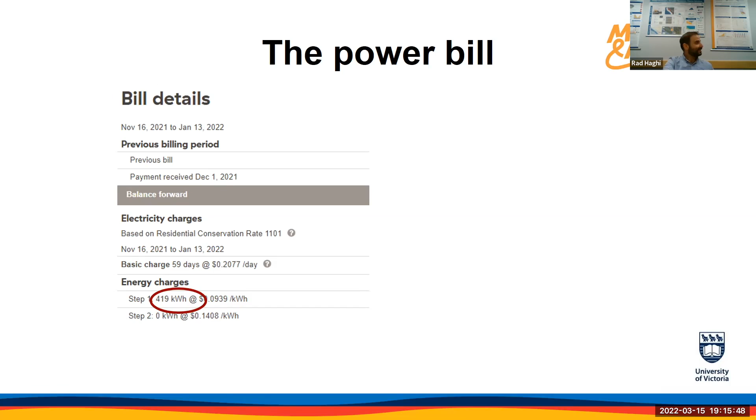But what is the meaning of power? When we talk about power and energy, what do we mean by that? If you look at one basic baseboard heater, which is quite popular in Canada, it needs 1 kilowatt of power. If it is on for 1 hour, then it is 1 kilowatt hour of energy. So we have to be aware of the difference between power and energy when we play this game.

In this game, we mainly talk about power rather than energy. That's why this name is called megawatts, because in reality we deal with megawatts. When we talk about the grid system, megawatts and gigawatts, we talk about a grid system. Another example: if you have 2 half-kilowatt baseboards and use them for 2 hours, we again have 1 kilowatt hour of energy consumed.

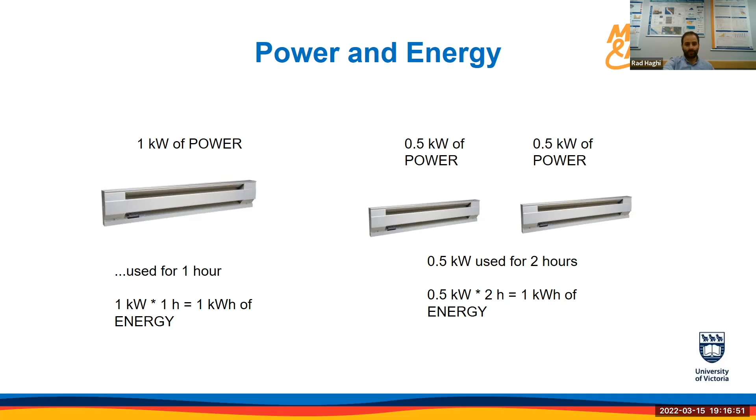And energy is what we see in our bill. So 419 kilowatt hours of energy in 59 days, which is 1,416 hours, means on average I use 0.3 kilowatt of power. Or if I had a baseboard on all the time, it means it is equal to more or less 17.5 days of energy consumption of one baseboard.

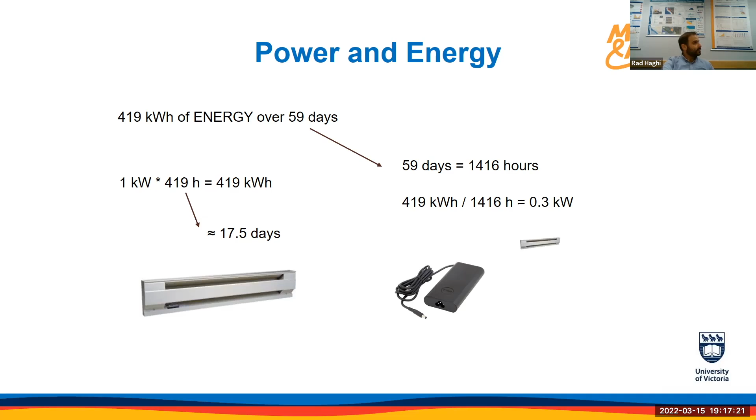So knowing what is power and what is energy, let's talk about what uses electricity. What uses electricity, in general, falls into three main criteria: it's either residential, which means housing, the place that people live; commercial and institutional, like universities or offices; or industrial, what we use in factories.

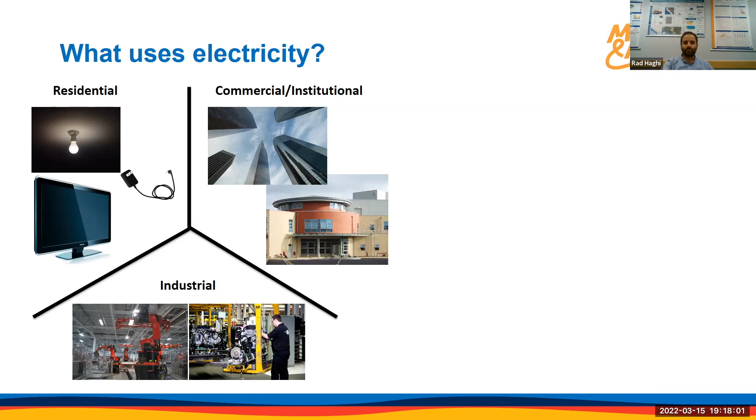And ballpark, what we can say is each of them uses 1/3 of generated electricity, depending on the country, but on a ballpark basis, we can say each of them uses 1/3. And what generates electricity? It is based on a report from IEA.

It is the percentage you see which each source generates electricity. For this case we see in 2017, based on the IEA, International Energy Agency report, almost 39% of electricity generated by coal, 23% by natural gas.

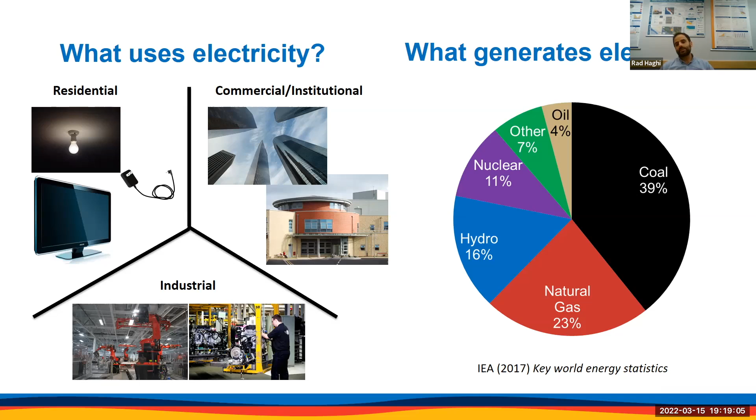16% by hydro, 11% by nuclear, and 7% by others. So in 2017, which is 5 years ago, we can still see most of the energy generation we have is not that environmentally friendly. Coal is the most polluting way of generating electricity, and still 39% of our electricity generation is based on that. This is changing country by country, but this is based on the global view.

Electricity is about supply and demand. When we talk about supply and demand, imagine a bakery. The baker bakes 10, 20, 30 loaves of bread and keeps them there. The demand is people - they go there and buy one or two, but the rest can stay there till someone comes and picks it up.

But for electricity, there is no store. There is no place that you can store your energy in large quantities to give to the market based on demand. You can talk about batteries, but batteries are still very small scale compared to the electricity we are using, so we cannot really store large quantities of electricity.

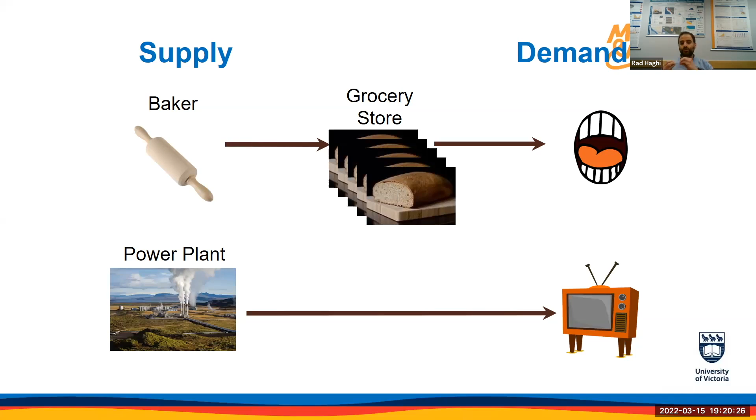So what we generate should go to the houses, should go to the factories, should go to the institutes and offices and get used. There is no place to store it. So it should always be supply equal to demand.

We have a supply and it should be equal to demand. How it works is we turn on our TV - let's say we turn it on tonight to watch something. The moment we turn on the TV, we put this demand on the grid and our transmission system, and that demand should be met. Otherwise, what would happen is we'd have a power outage - we're not going to have any electricity. So we need to always have supply and demand go hand in hand and together.

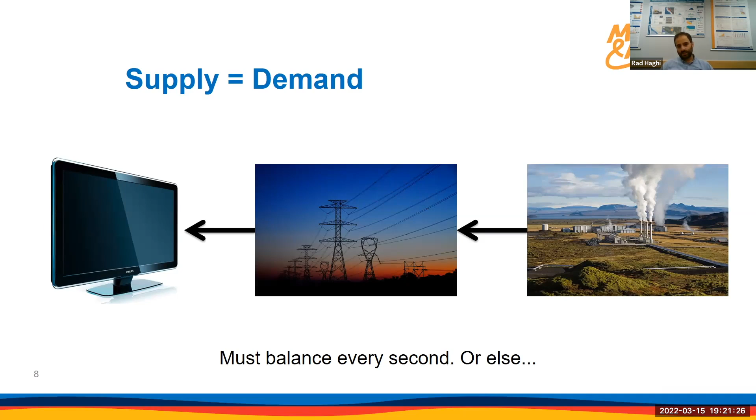Also, we cannot overgenerate or undergenerate - both can cause blackouts and cause a problem for us. Keep that in mind, because this delicate balance is something we need to keep in mind every second when we talk about energy generation.

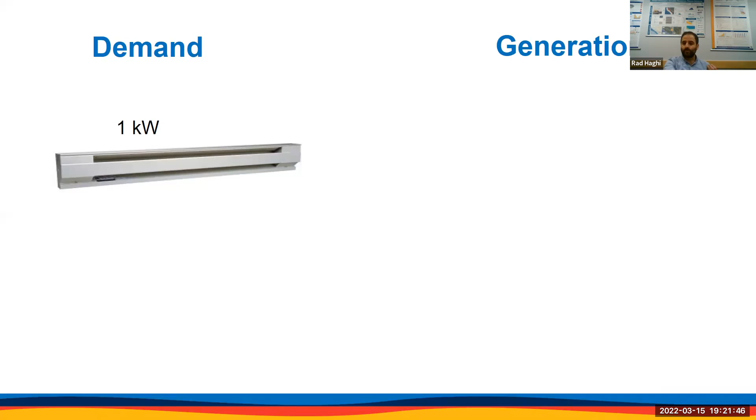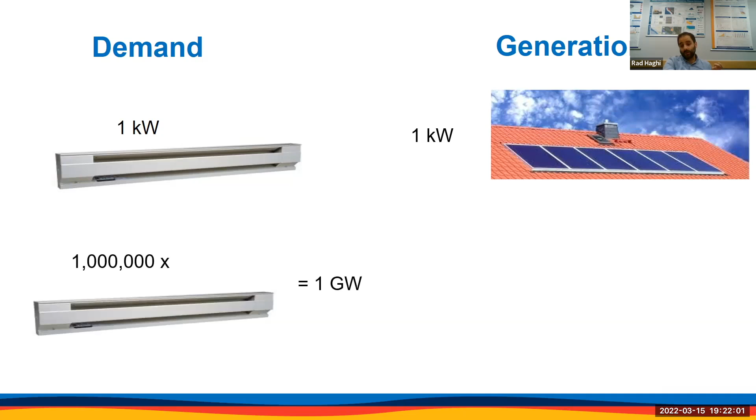For example, we have a demand of 1 kilowatt. Going back to our baseboard, when we turn it on, 1 kilowatt of power should come from the grid connection into our baseboard. Generation can be some solar panels - a house's solar panels can more or less generate 1 kilowatt of power. And if you have 1 million baseboards, it means we need 1 gigawatt of power.

Then you need a dam, like the Site C dam. The picture you're seeing is the rendering of that, which is generating 1.1 gigawatt of power for us - it's the capacity, actually.

So these are what we talked about till now - what is the demand, where the demand is coming from. We said the demand comes from three sources: residential, commercial, and industries. We talked about how supply and demand should always be meeting each other - at the moment you have the demand, you have to generate enough electricity to supply that demand.

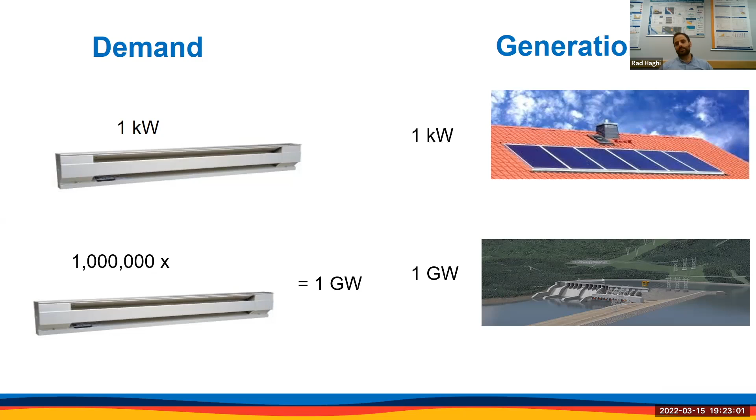And also we talked about the transmission system - that transmission is something that connects a generation to the demand. It is what we have to use.

These three are actually the game elements. So the game elements coming from, first, the demand - it starts by what is the demand of the hour that we are going to supply. The way it works is we tell the participants what is the demand of the specific hour of one day. Then the transmission system in this game is represented by the towers that we have.

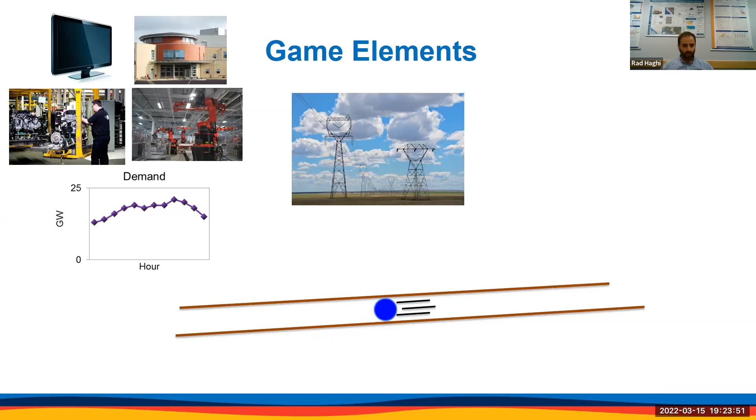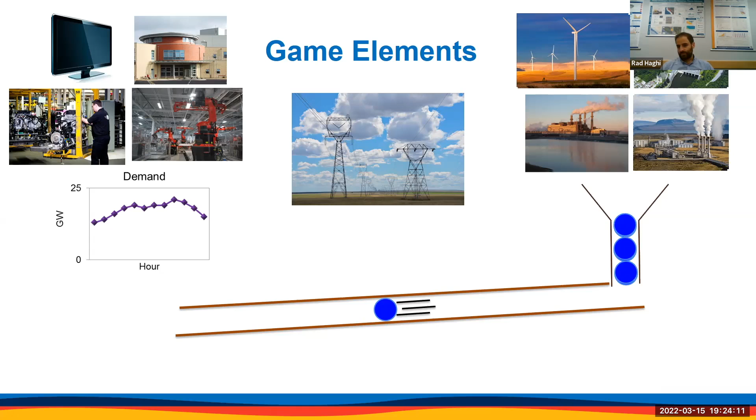And then we have these marbles. What they are doing, and the name of the marbles coming in this game, is coming from the gigawatts of power that's going to be moved from generators - which can be wind, which can be coal, different types of generators, or a generator mix - which we present with a funnel to meet the demand.

The way it works, you'll see when I'm playing the game - we drop these marbles into this funnel, each representing 1 gigawatt, which is a big number in this case. By moving these marbles from the generator to a city that we represent, we're going to make this game happen. What is important is at every hour, we have to keep supply equal to demand - this delicate balance should stay steady.

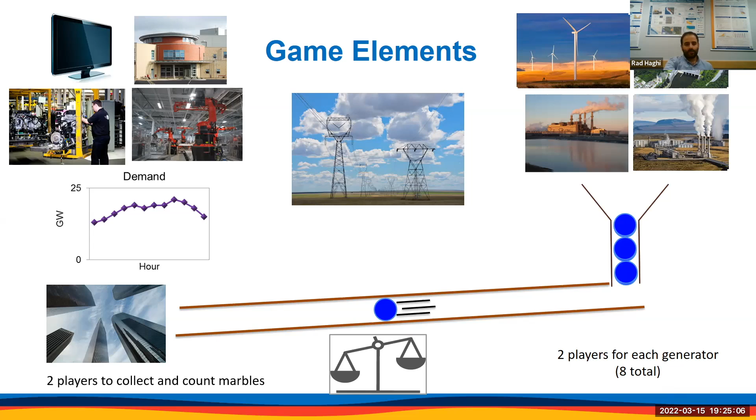Yeah, okay, we talk about that.

So what is the objective of the game? The objective is generators, of which we have a couple different ones here, need to work together to supply the demand presented to the people playing the game. We divide the day into 12 intervals, meaning every 2 hours there's one demand, and we announce that demand.

There are 3 steps that game participants should do. First, discover what the demand is every hour, which we tell them. Then decide the number of marbles to use per generator, how they can decide that. There are also negative points for generating electricity from coal or gas, to represent the carbon or CO2 emissions from them.

After putting the marbles in each generator, they release the marbles, which go through the pipes, our transmission system, to the city that we have there. Then we collect them into something you can look at later and count, which we call the collector.

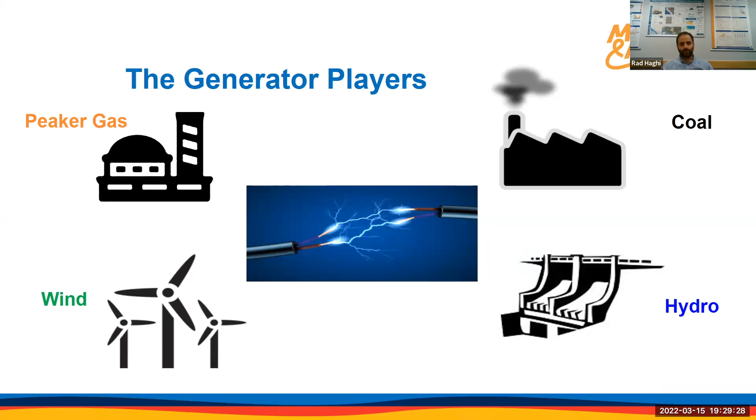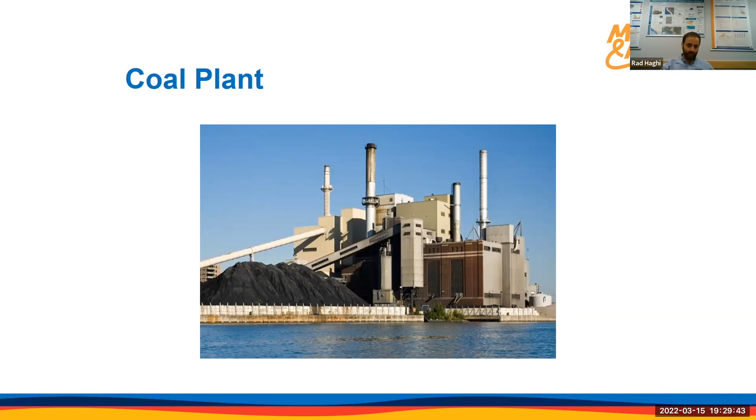The first one is the coal power plant. How it works: we generate electricity by spinning a turbine with the steam from burning coal. We burn coal, boil the water, generate steam, and use that to move a turbine. You can think of it like a campfire - it's slow to start a fire, slow to get a bigger fire, and also slow for the fire to burn out. It takes time.

Another alternative is a coal-fired steam locomotive train - it also takes time to build up, slow down, and change speed. What does this mean for this game? It means they have large capacity; for example this is what we call base load. But every 2 hours when we move to the next interval in the game, you can only change the number of marbles generated from the previous hour by 1 or 2. So if in the first hour you start at 9 marbles, meaning 9 gigawatts, and you go to the next hour wanting to change your coal generation, you can go to 10 or 8, but you cannot suddenly go to 12. This is the nature of the coal power plant - slow to rise and slow to go down.

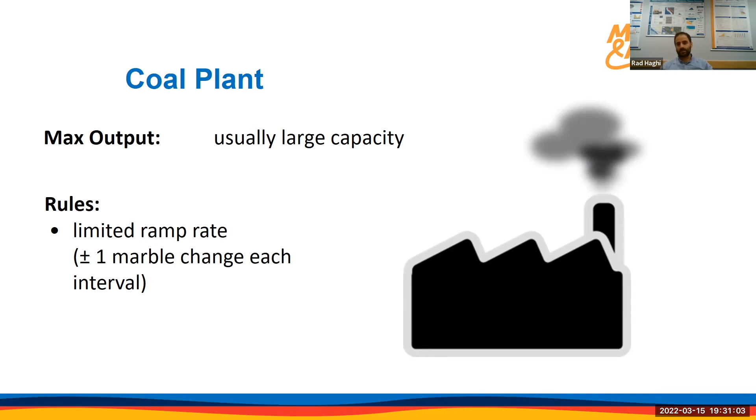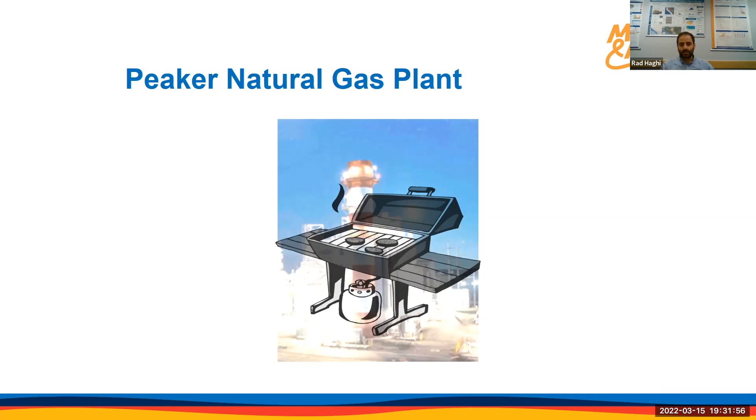However, another one is peaker natural gas. How does this one work? Again, you burn gas, boil water, generate steam, and use that steam to rotate a turbine - the principle is the same. The analogy for this is like a gas barbecue - it's very quick. As soon as you turn the heat up, the heat goes up and you have more heat, so you can generate more steam and more power. It works based on what you put in - it can suddenly increase quite a lot. That's why it's called peaker gas, because in peak hours you can use it to cover the demand in your system.

Again, you can put in as many as you want, but usually peaker gas plants have small capacity because they're expensive to operate and aren't used very often. You only use them when you need to meet the peak of your electricity generation.

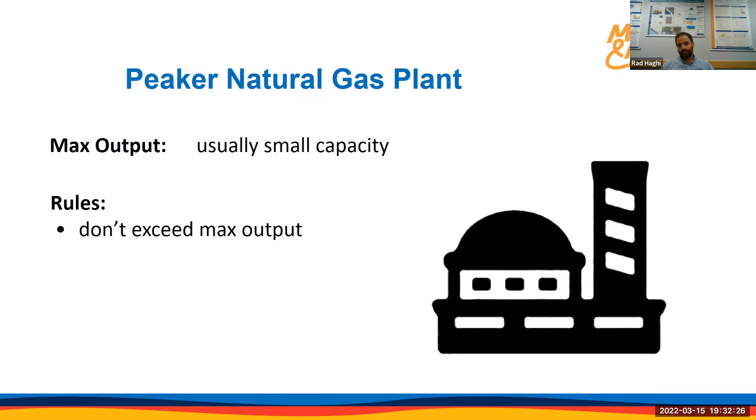Yeah, that's because they are very quick. They are used in the peak hour of your demands.

Another generation that we have is a wind farm. So how do wind farms generate electricity? The way they generate electricity is they capture the wind with their long blades. They turn and move, and they transmit this rotation to a generator, and that generates the power.

They have no emission. They're renewable, they're green. It means we have this wind, which is most of the time blowing, and we generate wind power from that. But what if there is no wind? It means we don't have any power.

And what if we don't know how much wind we are going to have? We cannot really predict how much wind we are going to have for the day after, or for a week from now. It is really hard to predict those things. In other words, we cannot control the wind. It is not like a coal power plant where we know we have the coal, or a gas power plant where we know we have the gas. We don't have any control.

This is the intermittency of wind turbines or wind power generation. Intermittency means we may not have electricity at the time we need electricity from wind. And that is one of the drawbacks of renewable energies, especially wind and sun. You may have your peak at 6 p.m. today, this hour, which is more or less in Quebec right now, but you may not have anything. So you have to keep that in mind.

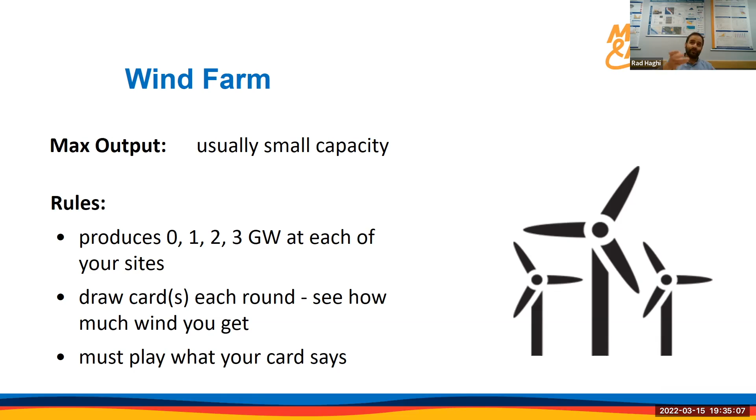In order to incorporate that intermittency into the game, we made a deck of cards. So for every hour, you flip a card, and based on the card that you flip, which I'm going to show you, you generate a specific amount of power from wind. It's better.

The last one is the hydropower plant. The power from a hydropower plant, which is I think the majority of the power generated in Quebec, is based on a dam and the water behind the dam. The water goes to a turbine, and the turbine generates electricity. It is clean electricity, and it is the largest form of renewable electricity globally.

The problem with hydro is it cannot be everywhere. It has limited resources. You need a specific geological condition to be able to build a hydro dam, and a specific natural situation to build this hydro dam. The good thing about a hydropower plant is it can easily increase or decrease output by opening or closing the gates.

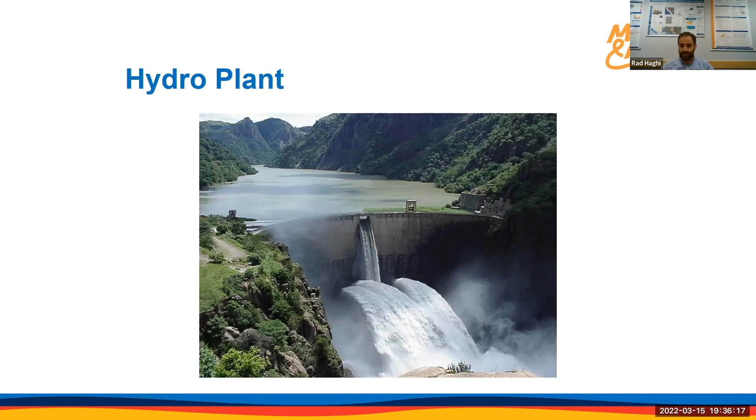For this game, usually hydro powers have medium capacity, depending on how you design your game. But there is a limited reservoir for the dam you have. You don't have an unlimited amount of water behind your dam. And in order to keep things going, there is a minimum discharge in every turn of the game. These things aren't that clear, but they're going to be clearer when you play the game. It is really hard to explain them in words until you've played.

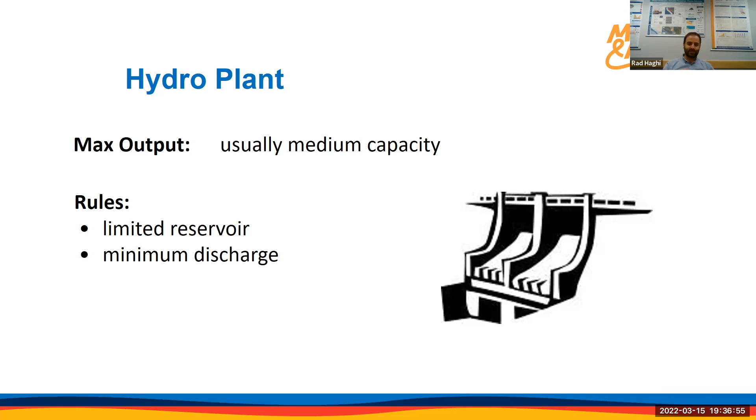Rules overview and the characteristics: coal is big and slow, so it can generate lots of power, but it's slow to ramp up and ramp down. Gas is small and flexible, so it's used to meet the peak hours. Wind is variable; it can be there, or it cannot be there. And hydro has limited reserves, so you have to keep in mind that you don't dry out your river when you use hydro.

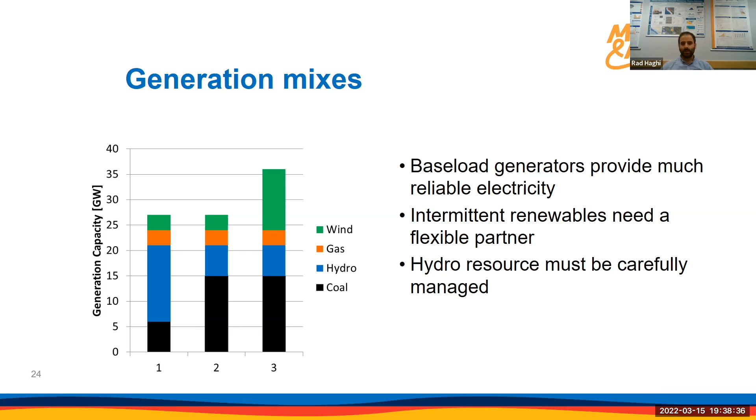Here we want to talk about the generator mix. Each electricity grid system has a different generator mix. Base load is the much of the reliable electricity in a generator mix. Usually this base load can be coal, for example for grids 2 and 3, where number 2 is mainly Alberta, which is coal-dominated, and number 3 is Germany. For these two, most of the load is coming from coal. Then you have hydro, gas and wind covering the rest. Somewhere like BC, the base load actually comes from hydro and a bit of coal. This base load is something you have to keep in mind when playing this game in order to meet the demand.

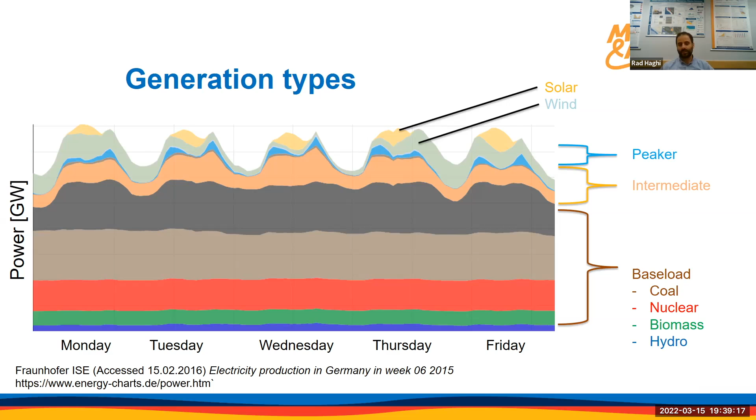Another important factor for this game is the operator. The operator is actually the player in this case — the one who is operating the system and deciding how to meet the demand we are seeing.

I think this is the basic concept of this game. It may sound quite complicated or may sound quite simple. However, in order to make it more clear, I'm going to play a bit of the game. But before we go in that direction, I want to know if there are any questions.

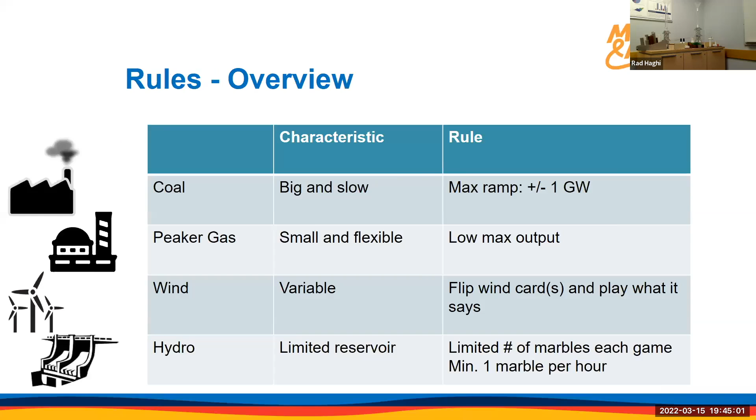The first thing that we do, I cannot see my screen, so I hope you can see things. Let's see if I can rotate this. Okay, I can see that.

So these are the cards that we have for wind. If you look at these cards, you can see it has a time, it shows the time of day, and then it has a description. So here it says light wind, there is a bit of wind, your turbine starts rotating and generates a bit of electricity. Let's hope the breeze builds. It's also a bit of fun there, a sense of humor.

And so it says 1 gigawatt, right? So here, for this case, I have this wind generator, and it's supposed to generate 1 gigawatt of power. So how much did we have? We have 13. Okay, so I put one marble here, this is for 1 gigawatt of power that I have.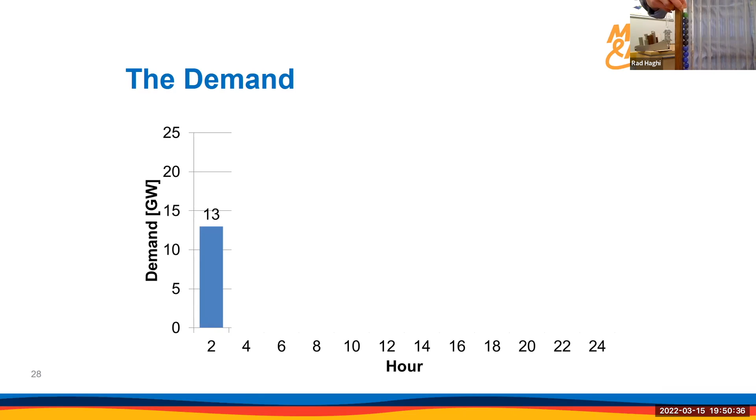So the first hour we met the demand, and then if you go to the next, it is 4 a.m. People are sleeping, no one is really turning on anything. So the demand is not changing that much. So again, it is the same story, but the first thing that we have to do, we have to see what is the wind condition.

And it's 4 a.m. Again, the same story, we have only 1 gigawatt of power generated. So 1 gigawatt of power.

Where are the... oh, there, okay. Power of this one. So again, we generate 6 gigawatt of power for coal, and then we have 6 gigawatt of hydro.

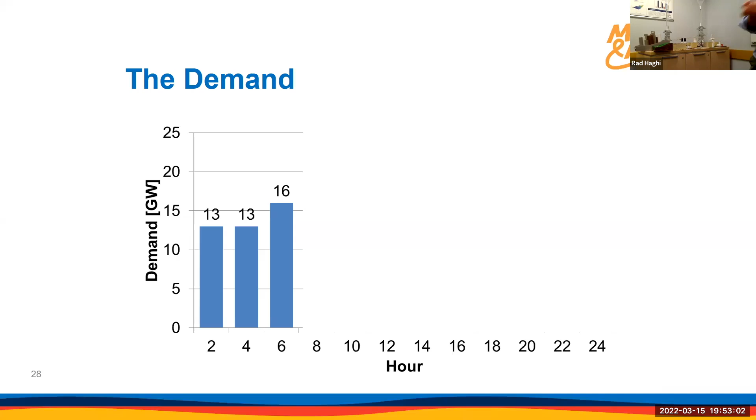I am going to play another hour. It's the last one. So then you get to 6 a.m., and 6 a.m. is the time that people are waking up. So what should we do?

It means we increase in the demand, and we have to meet the demand. Or the 6 a.m. card says light wind, so again it's 1 gigawatt of wind. So we don't have an increase in wind. So what you just put the wind in, this is 1.

We know we cannot change the coal. It says 6, we were at the maximum. We cannot generate more than 6. So we put 6 again.

Okay, we have limited resources for hydro. The last time, how much do we need? We need another 9, so we have 2 options. We can put 3 more of hydro here, or we can put 3 peaker gas, because it is something of a sudden jump in our generation. So we put 3 peaker gas here.

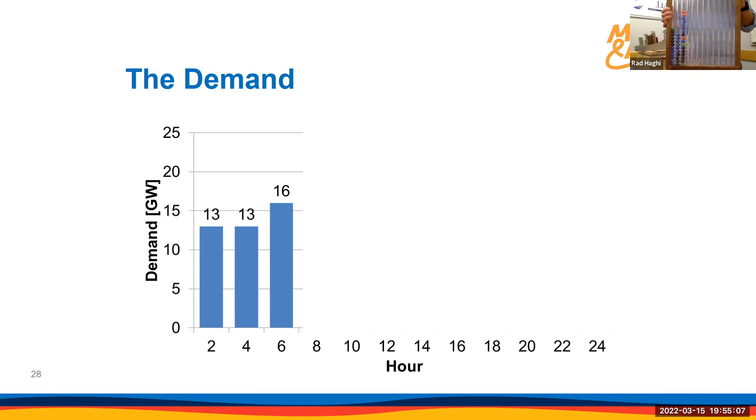And then again, yep, and then we put it back in the collector. So I think I made a mistake in counting probably, but it looks like this in terms of collectors. So this is the way this game works.

This continues and goes on for the other hours. At 8 it goes higher, and then for 10 a.m., and then it goes down, and then you get to your peak hour, which is 6 p.m., and then it goes down again. So this is like a day that you play.

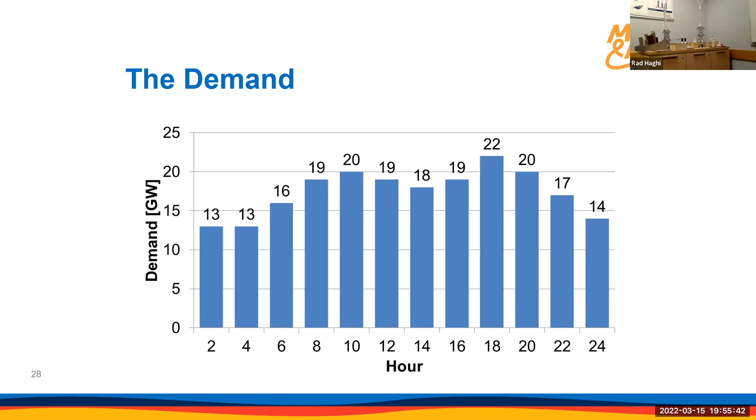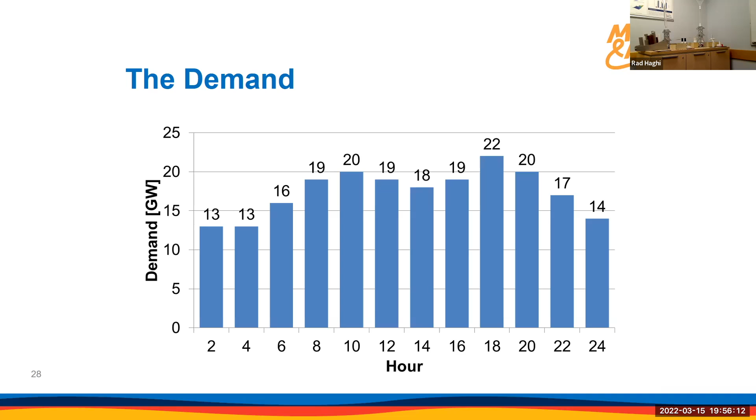Usually we have 2, 3, or 4 teams, and what is variable between different teams, if they all have exactly the same generator mix, is in this case how the wind power generation is changing from team A to team B to team C to team D. So they have different wind power generation, and then they have to decide where they use peaker gas, where they use more hydro, or if they have more coal capacity, which in this case they don't, if they can use it. Yeah, so this is almost 5.

Yeah, this is the game that we developed here.

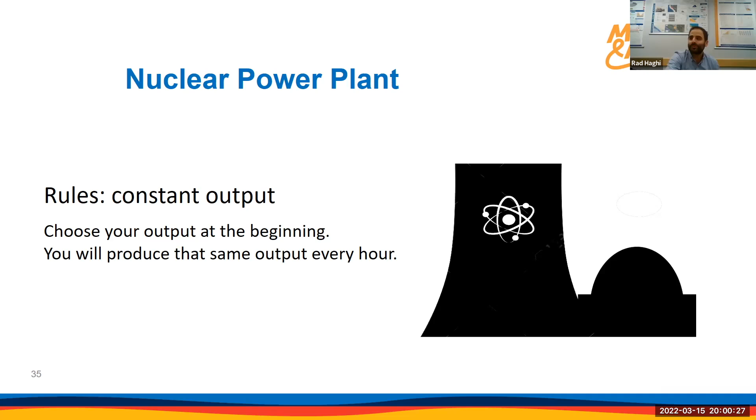Yes, thank you, I just have a question regarding hydro. If I recall, you said that you can use up to 15 hydro marbles, right? Yes. So why don't you use the 15 from the beginning in order to decrease the CO2 impact?

Yeah, let me see if you have it here or no. Because during the first 2 hours, it was only 13 in the power demand. So when you play this game, based on the capacity of hydro that you're designing, you have a limited number of marbles given to you. So for example, in this case, I think we had 15 gigawatts of hydro, so you only have 60 marbles. So you have to use it wisely, otherwise you lose the game. So if you cannot meet the demand, and if you dry out your hydro capacity, then you're losing the game.

That's why I didn't think about that, because I played this game too many times. So, but the thing you have to keep in mind is because you have limited capacity for generating, not limited capacity, limited reservoir for your hydro. I think I missed the point, because you said that the 15 are not for each hour, but for the whole game, right?

You can generate 15 for 1 hour. Yeah, but the next hour you won't have any left, right? Maybe you don't have any left, because if you generate 15 for 4 hours in a row, then if you look at this part, I don't know if you can see my cursor. If you have 15 gigawatts in your reservoir, you have 60 marbles. And if you generate 15 for 4 hours, then you are out of hydro. Yeah, thank you.

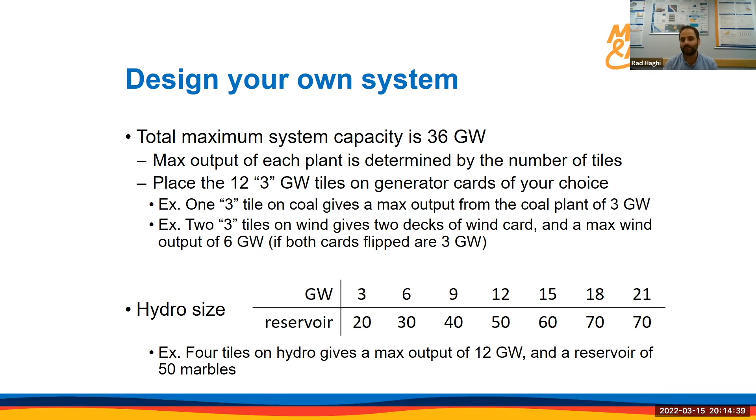I think I have to contact the people at Max Planck again. One of the people in this meeting said they're playing this game - I can't remember her name. Audrey has two versions of the game they're playing. So as a physical game, it is available and has been sold to different institutes in Canada and also here. So Alvaro, if you want to play, you can ask Audrey in the chat - she gave her address, if you want to plan parties.

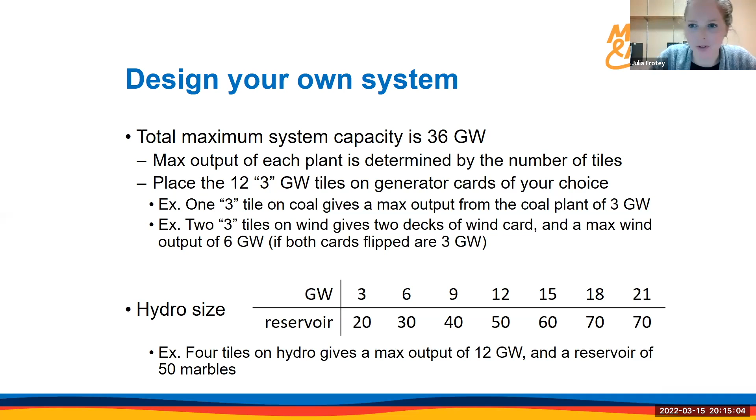Okay, maybe we'll take one last question, one or two last questions, so we don't keep too late.